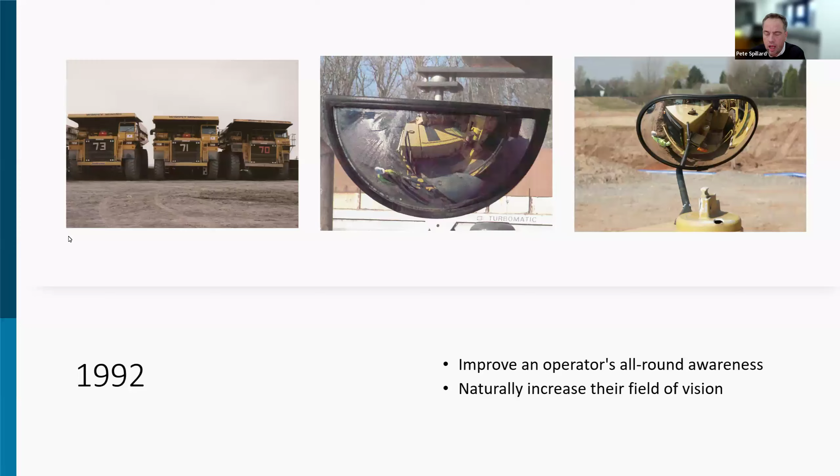32 years ago, we developed what we believed was the first convex mirror for construction equipment. We use it to naturally enhance an operator's field of vision. This particular mirror was developed for 100-ton haul trucks working at Wimpey Mining in Fosslas.

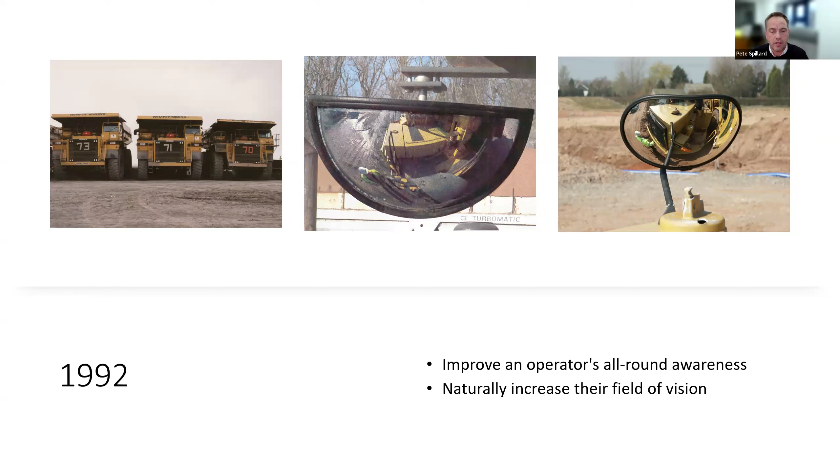Because of that convex mirror, and how we were naturally trying to enhance visibility, it was actually difficult to get this convex mirror, or the concept of improving an operator's field of vision, through to our customers. So this is over 30 years ago.

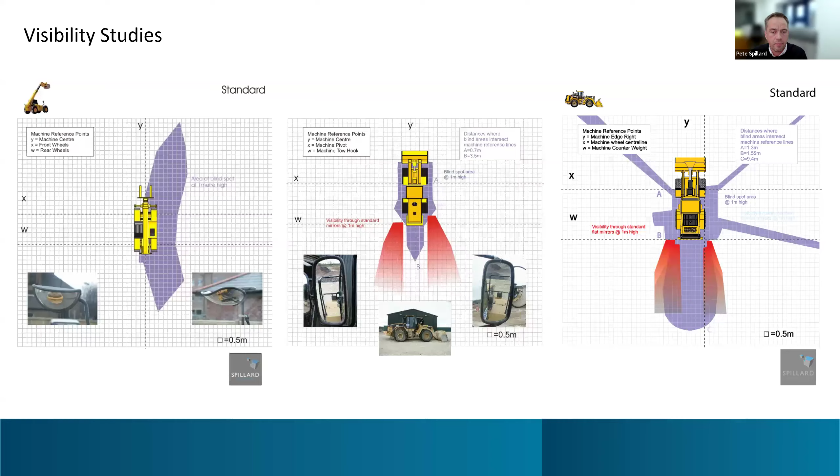So what we actually started to produce was visibility blind spot maps. These allowed us to understand where the restricted field of vision is. We did visibility studies from anything from telescopic handlers, wheel loaders, through to site dumpers, through to 150-ton haul trucks.

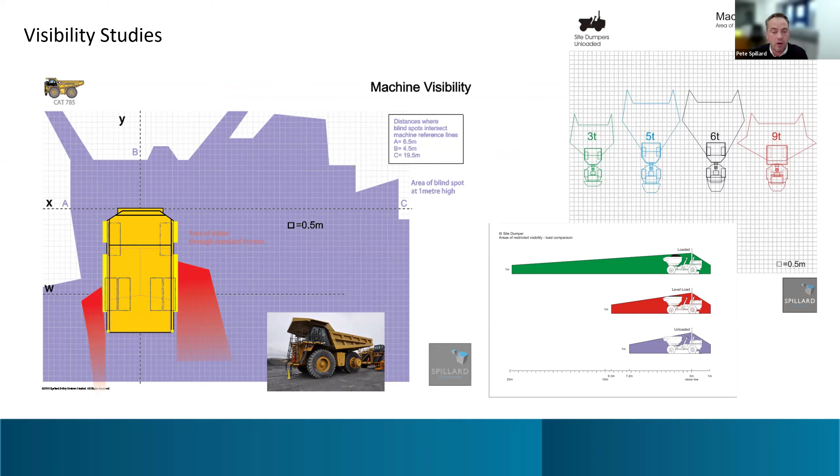This particular haul truck here, on the visibility studies, each of the squares represents the blind spot that's created from the driver's position. So the blue area is that blind spot, and these are the studies that we've been creating now for nearly 30 years. So why are we having challenges on site?

Why are we still having these challenges with moving vehicles? We've installed convex mirrors, reversing cameras, 360-degree cameras now for, as I say, nearly 30 plus years. But struck-by moving vehicles is the second highest fatality rate in the construction industry.

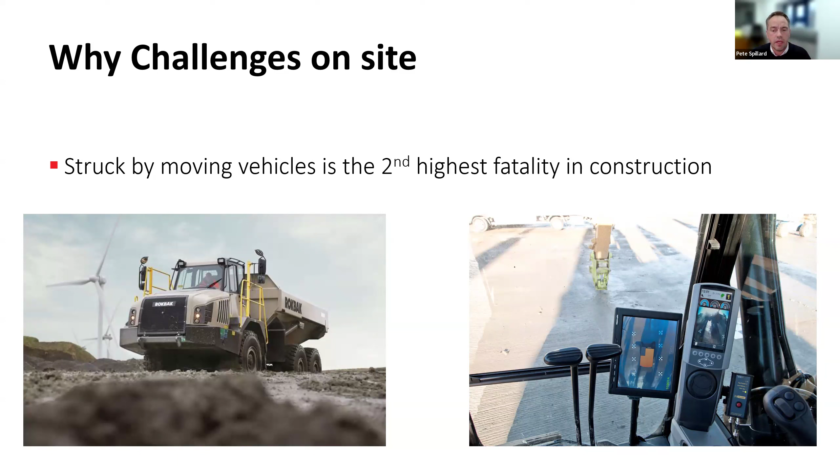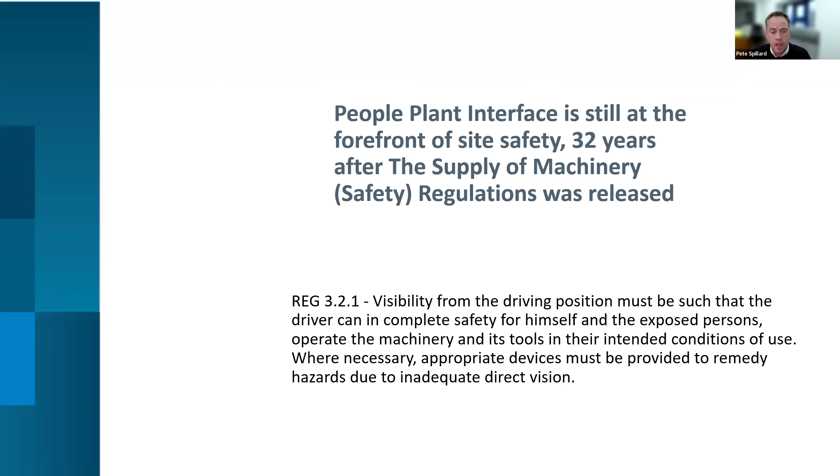We think, because of the work that we've actually been doing, we understand why there's an issue around the challenges that we see on site, and we believe that a small part of it is down to restricted direct vision. This restricted direct vision has started to come through because of things like noise reduction, ISO standards around noise reduction on new machines, and emission reduction. All this accounts for engine bays and engine covers becoming bigger. We look at ergonomics, and the design of machines has lent itself to restrict more and more direct vision. And then we take reduced tail swing, which is a safety feature to stop crush hazards, but it increases the height of the engine cover.

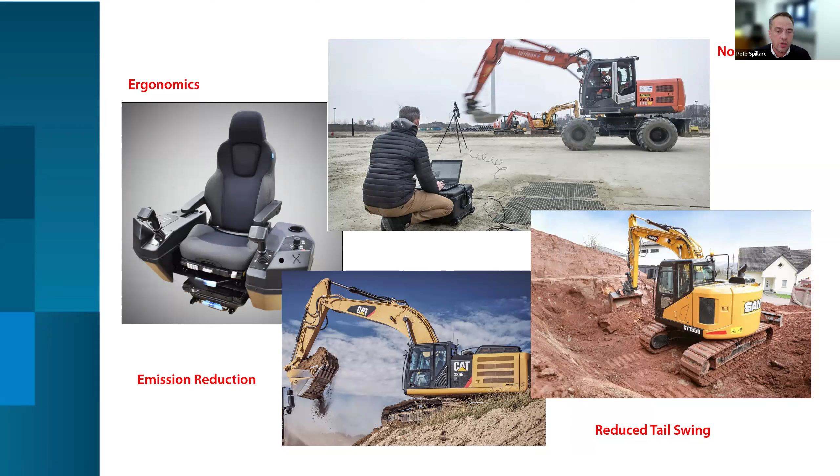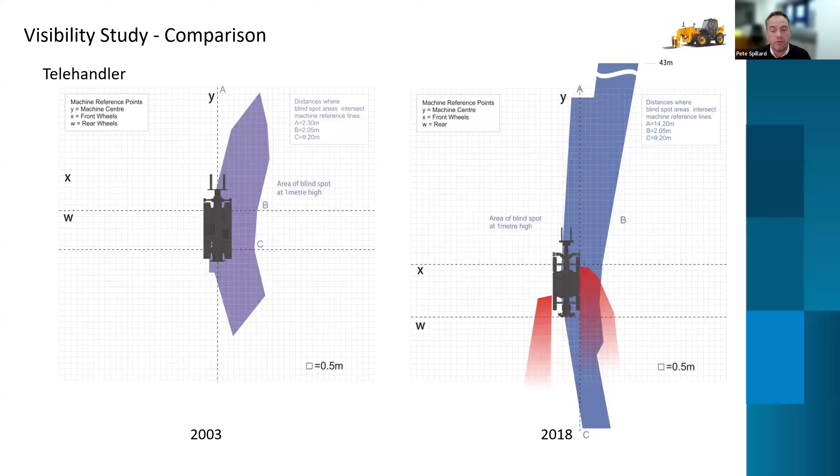In front of this machine, we can't see for nearly 9 meters, so we have restricted visibility for nearly 9 meters. Now we go to 2018, when we've incorporated new ISO standards around emissions, noise reduction and ergonomics. This particular telehandler now cannot see for nearly 43 meters in front, or on the offside of that telehandler.

If we look at a dozer, again in 2003, the restricted visibility around the machine is quite good. We look at 2019, and again this blue area is where the restricted visibility is from, after we've looked at noise reduction, emissions, or even ergonomics.

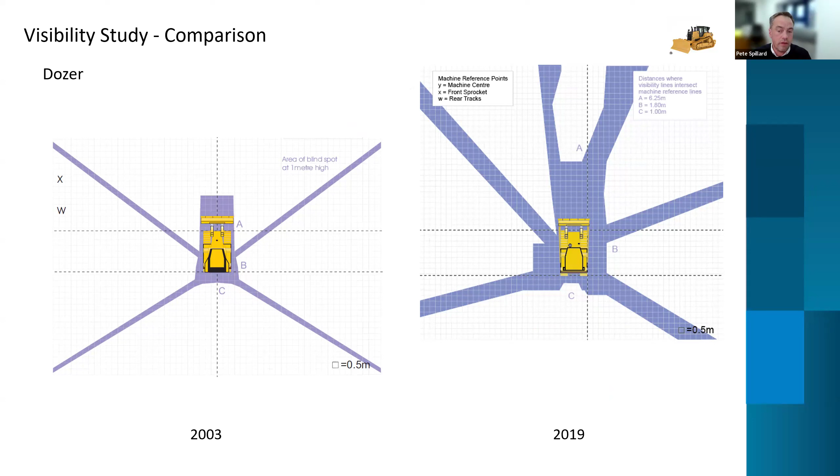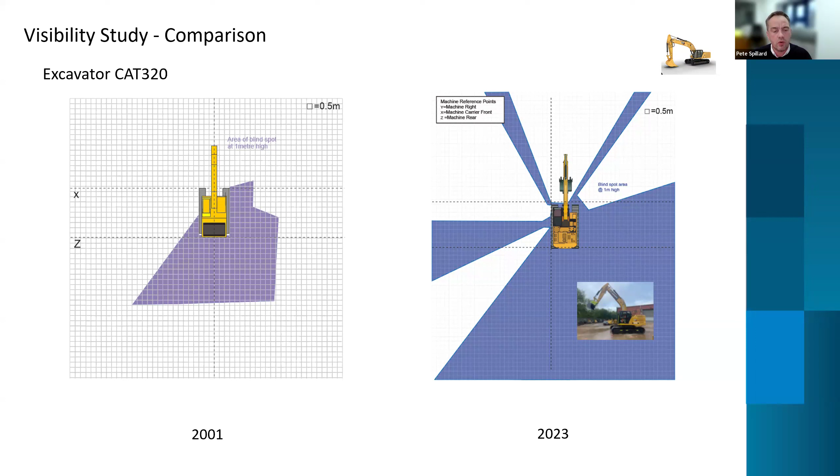We can take it to an excavator, so a typical 20-ton excavator that you would see on any construction site in the UK. We go back to 2001 with our visibility studies, and we see the restricted visibility isn't great, but at least it's not like 2023, where we have infinite restricted visibility around the machines. This is where we try to understand why we are still seeing these problems with construction machines. Another example, 2001 wheel loader, and we see that the areas of restricted visibility have increased again up to 2020.

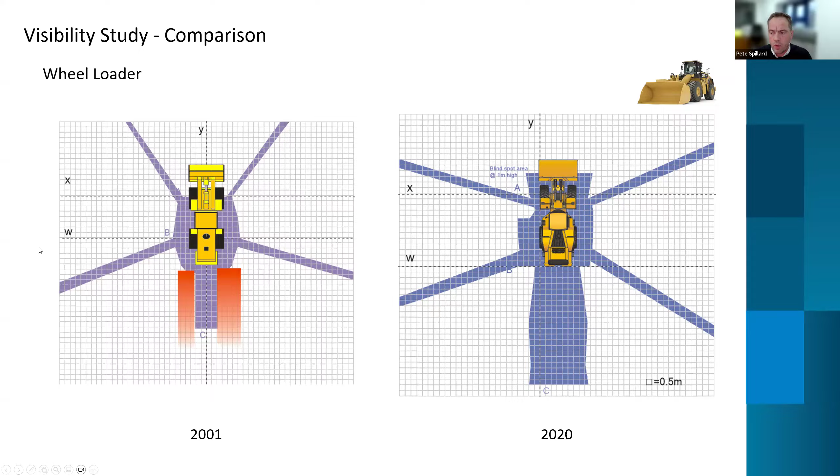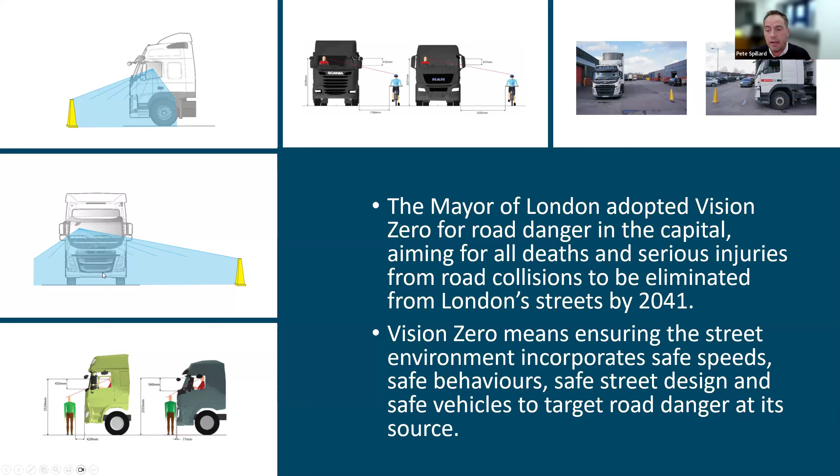So when we look again at direct vision standards - a standard for vehicles traveling into London - it has the same issues as we have with construction machines, and that is restricted visibility. A direct vision standard is designed to reduce the number of fatalities in London caused by large vehicles and vulnerable road users, and it comes back to the issue around restricted visibility.

So we look at a particular commercial vehicle, same as what we've done with visibility studies over the years, and we look at these two machines - this is a concrete mixer and a tractor unit for an articulated tractor unit. Again, we have issues around visibility and direct vision.

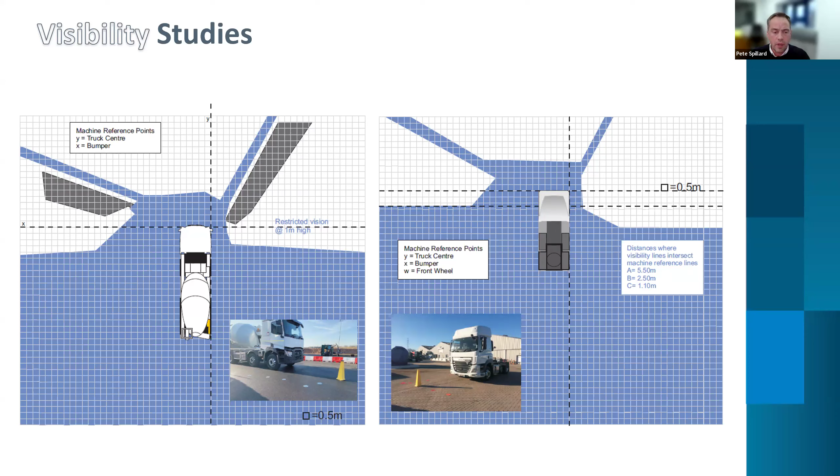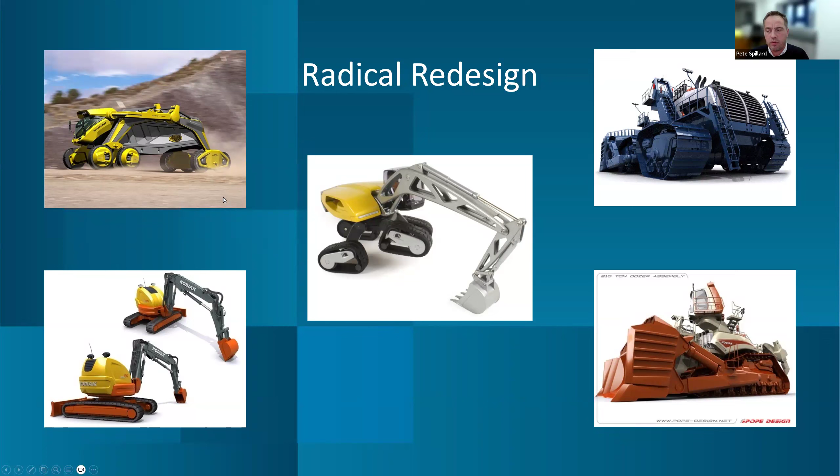Unless we start to look at radical redesigns of construction equipment, we're never going to reduce this issue around the fact that an operator wants to see. We train all our operators from day one when they learn to drive - mirror, signal, maneuver. What we haven't told anybody is that we can't see around these machines. So unless we've got radical redesign, which construction hasn't gone down, but commercial vehicles seem to be going in that direction, looking at radical redesigns around visibility.

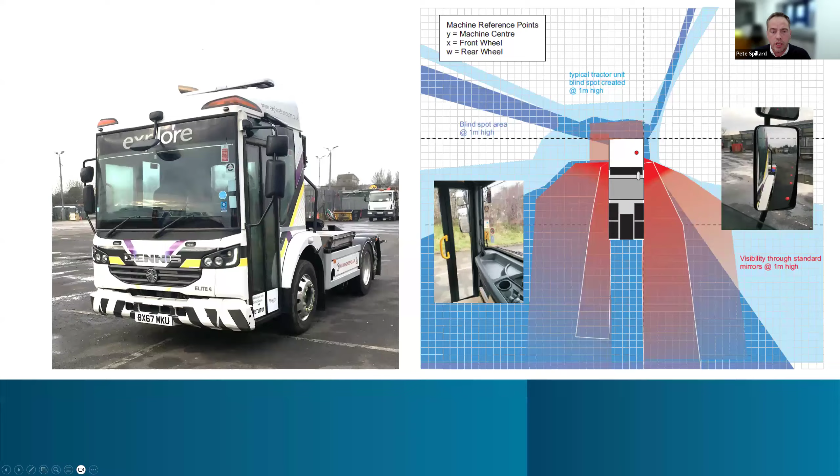But if we don't go down the route of radical redesign, where are we actually going to go? Well, the route we are looking at is maybe technology, and the technologies that we can move into different industries. So if we look at commercial vehicles, we've got the direct vision standard in London, which this year is now the progressive safety standard, looking for AI or human detection to detect vulnerable road users along the near side and across the front of commercial vehicles.

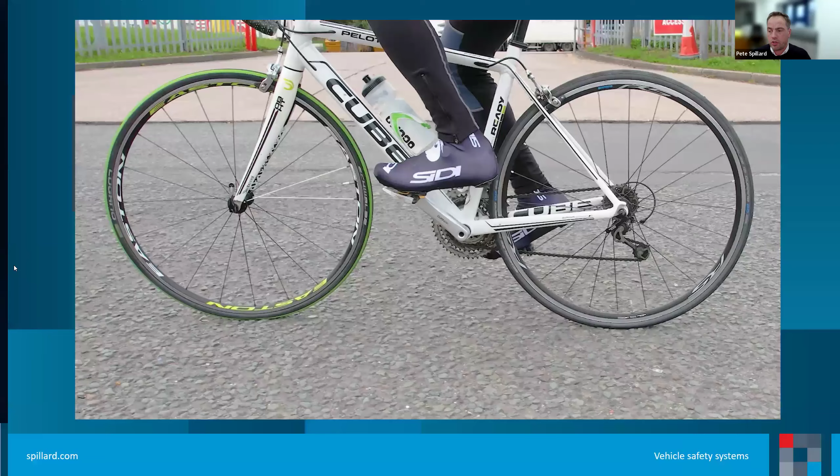So just a quick video to show you how it actually works.

Person detected. Person left. Person detected. Person left.

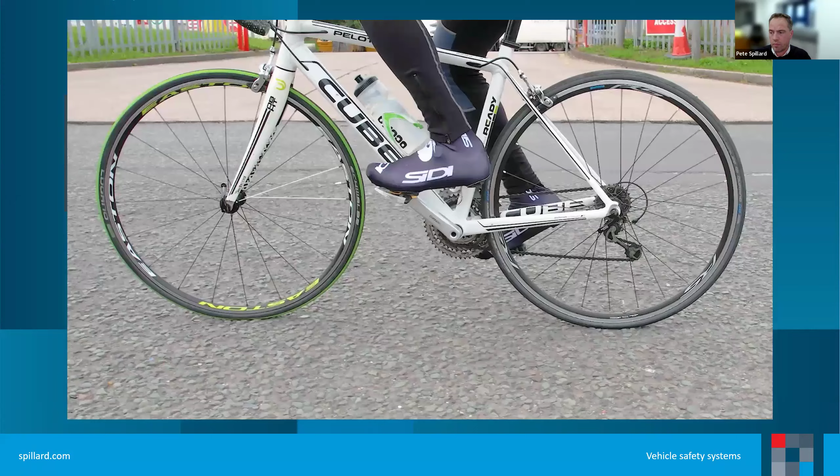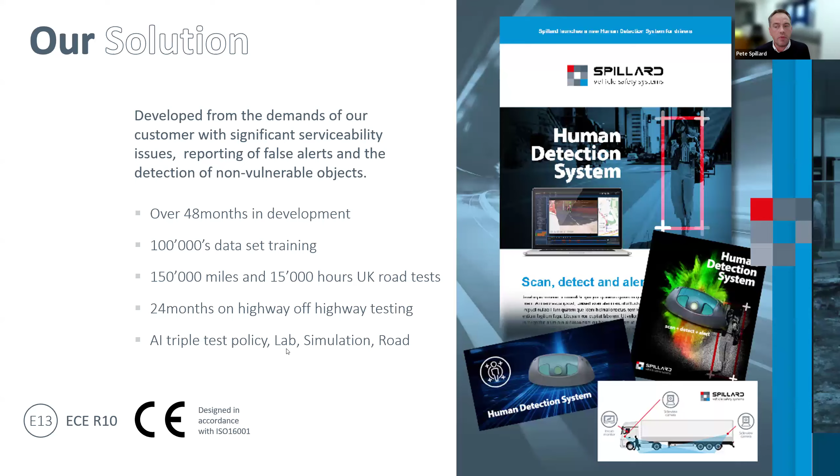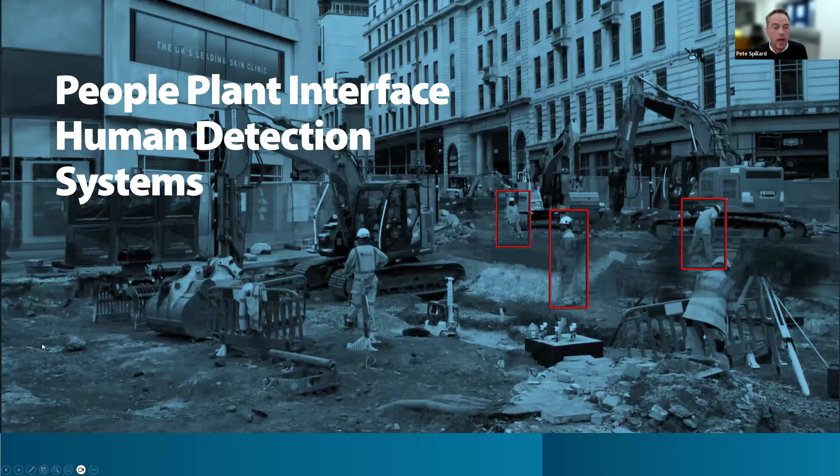So what you've just seen there is human detection. Human detection is a solution we've got, which is an AI camera that has been programmed with over 1 million data sets now to recognize a human form, human shape, human characteristics. We've put it into the commercial vehicle market, as you saw in that video - when somebody is detected, we tell the operator of that machine. We've also now started to move it into plant, so people-plant interface. We put human detection cameras around a machine and alert the operator to where somebody has strayed into a specific detection zone.

So another video just to show you how this actually works.

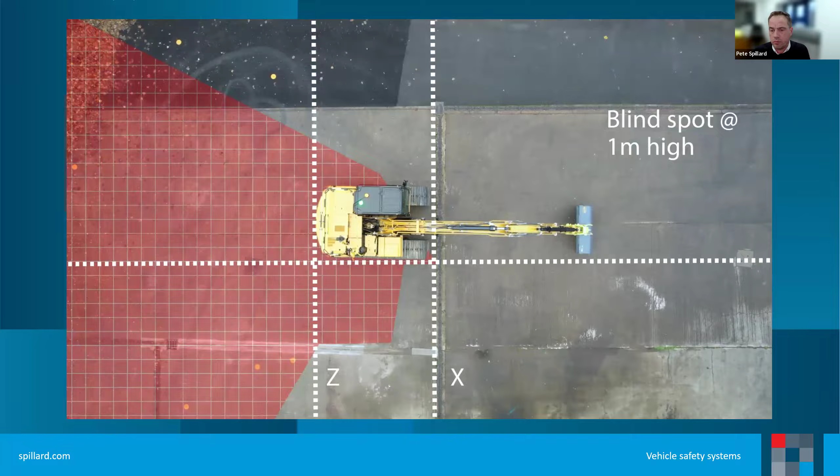Person rear. Person machine front. So we break it up into quadrants, and then we actually tell the operator that there's somebody around the machine.

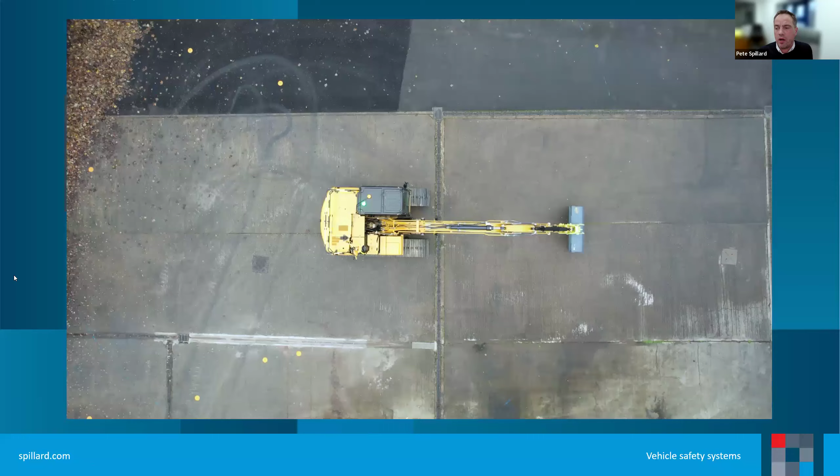So it's all about the technologies that are out there. In the simplest form, we can use 3D 360 cameras, which gives a bird's eye view of anybody around that machine.

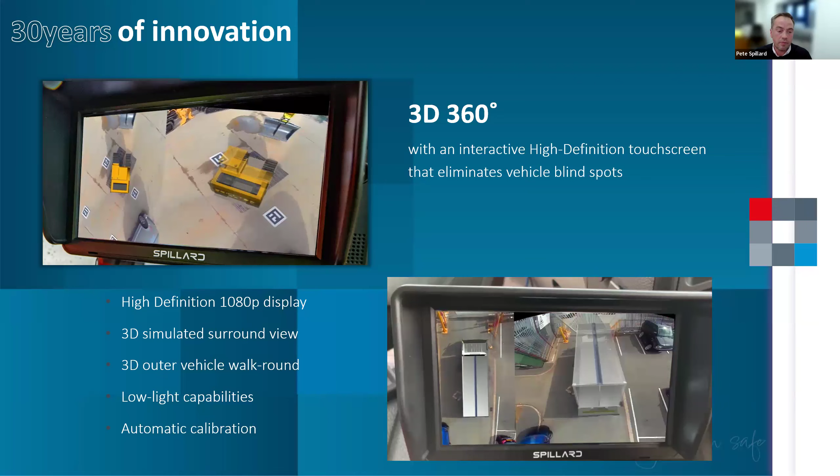So when we go back to the issues on sites and the challenges we have around indirect vision, we can improve visibility all the time, by providing 360 cameras or human form recognition technology to improve all-round awareness. But this has also led us to the fact that we are creating a large amount of data.

So these challenges we have on sites and how we reduce the incident rate, we have to look at different ways, not only technology but also the data that comes from it. Every single system is installed with cameras, and we are pulling live video feeds, which we can use to start to learn and educate our workforce. These challenges are how we change everything, how we change cultures and behaviors on site.

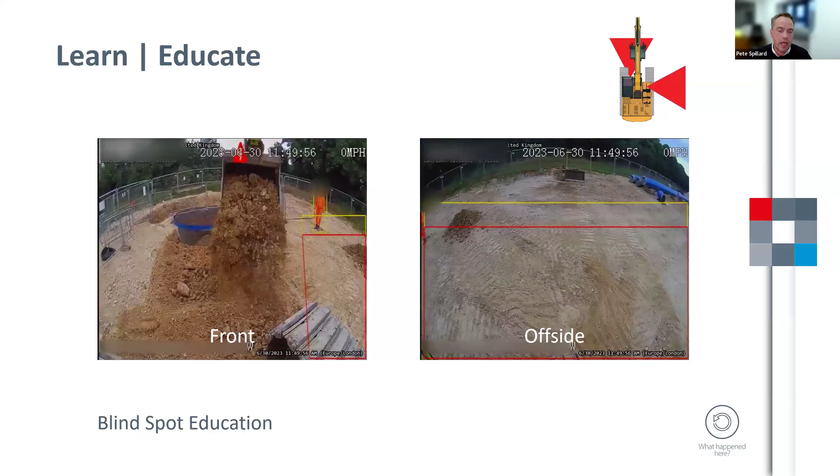This example here is an excavator. If you see in the top right hand corner, you'll see the plan view of an excavator. The red items show you where the cameras are located on that particular machine. This is a person operating the machine, he's digging. You've got a person to the right hand side actually walking down the blind spot of the machine. From the data and video footage we're gaining, we can train and educate around the blind spot.

So another example of this is it could be that we change our site layouts. All these challenges we have on site, we can use technology to change the way we change our cultures and behaviors, and this in the simplest form is site layouts.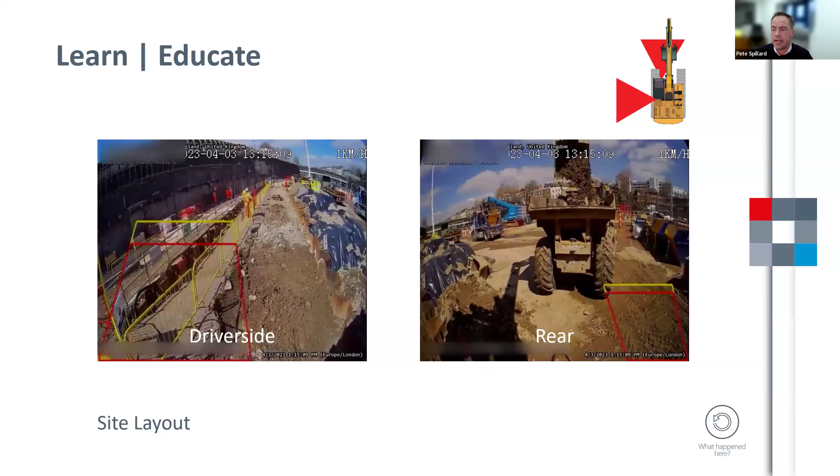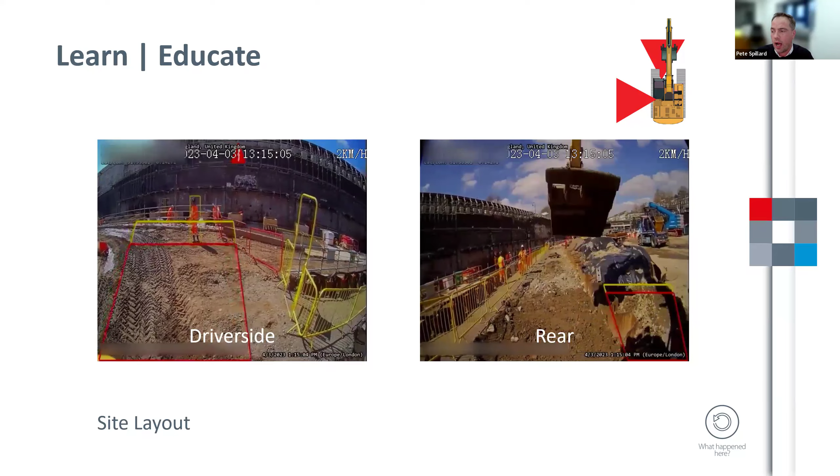So if we look at this video, I'll let it roll a little bit further. You've got two gated areas where they're walking across a haul road. The guy to the left is walking through an area where the excavator is operating. One of the guys is saying, why are you walking through here? And he's pointing to the site layout or the safe walkway, but he's actually walked through the danger zone of an excavator. So we start to learn about site layout from the data we're picking up.

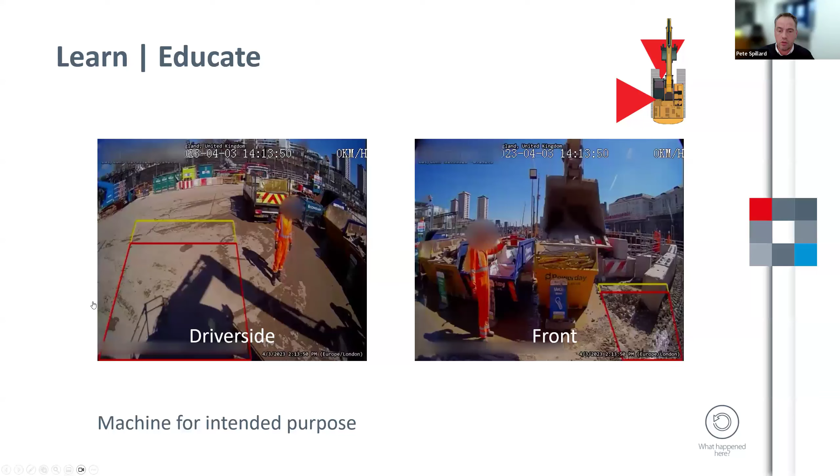So this is a particular example of traffic management, machine fit for intended purpose. Again, we've got the machine loading the skip with metal. The guy takes a step back, yet we've got somebody supervising it. So is the machine there for the intended purpose? These questions can be asked because of the data we're gathering and what we're putting together.

So this one's pedestrian segregation, and it's quite a good video and example of how incidents can happen on site and how we can train and educate. Just to explain this video, you've got a guy walking towards an articulated dump truck. The dump truck actually stops because he believes the guy is going to walk past him. You'll see the ADT starts to move again, because the guy has been distracted by the person in the excavator calling over to him. I'll let that carry on playing through.

He's now stopped. He's been disturbed by the person in the excavator and the excavator. So it's all about how we learn, we educate, and how we actually try to train this out of what's happening, all these challenges we're seeing.

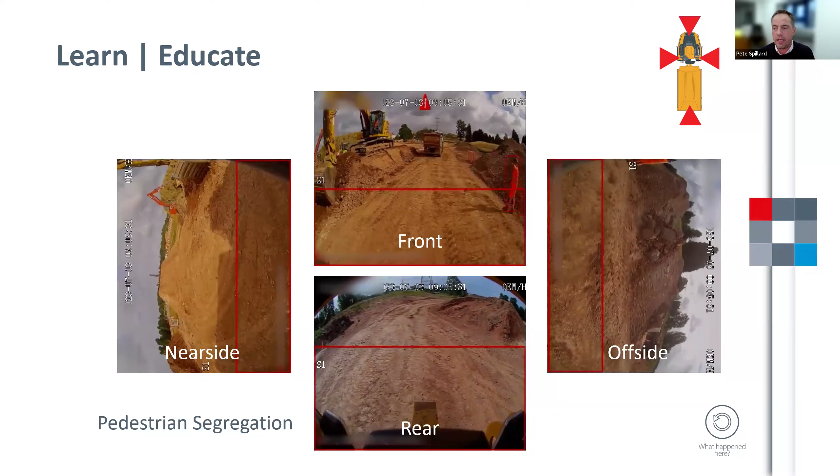Again, a further video, another one. So this is culture and behavioural change, maybe. These guys have been talking to the operator. The operator doesn't actually give them enough time to walk away before he starts slewing around on the excavator. So again, all this data we're finding and talking about starts to change behaviours and cultures around what we're doing, so we can remove these challenges on site.

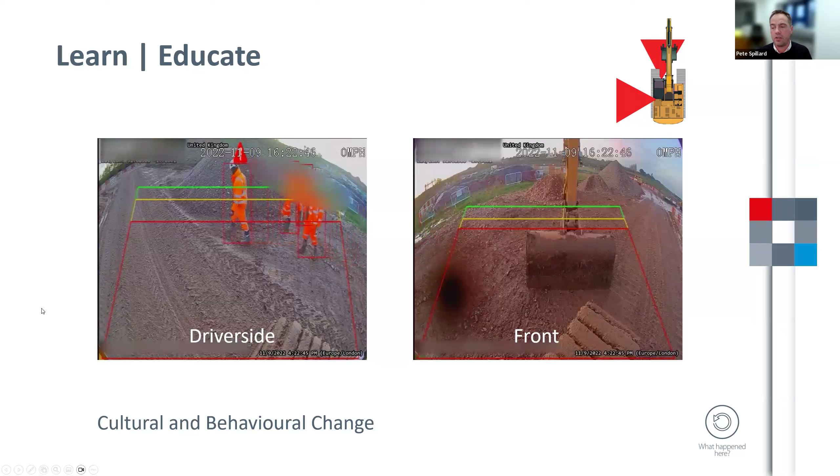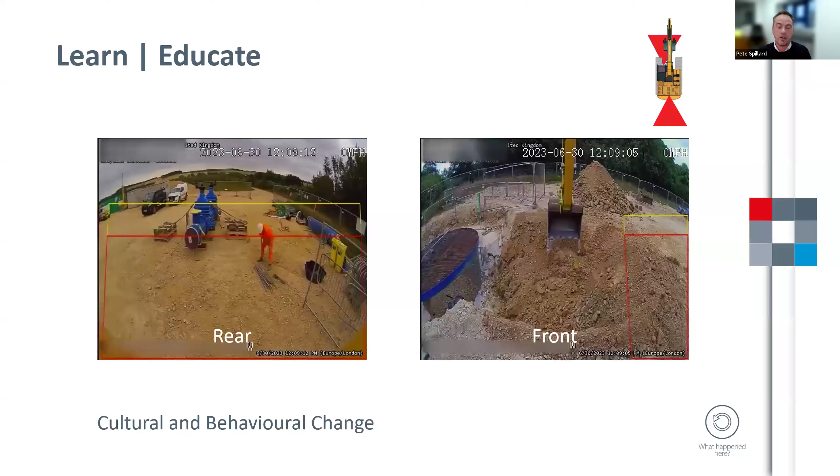So the final one here, guy's walking up to the back of the excavator, kicks a bit of wood out the way, decides he wants to clean up, so he's picking these sticks up, yet is within 3 to 4 meters of a working excavator. So it's all about these culture and behavioural changes that we're starting to learn from the information we're gathering, when we started around blind spot maps, but this is where it's actually taking us at the moment.

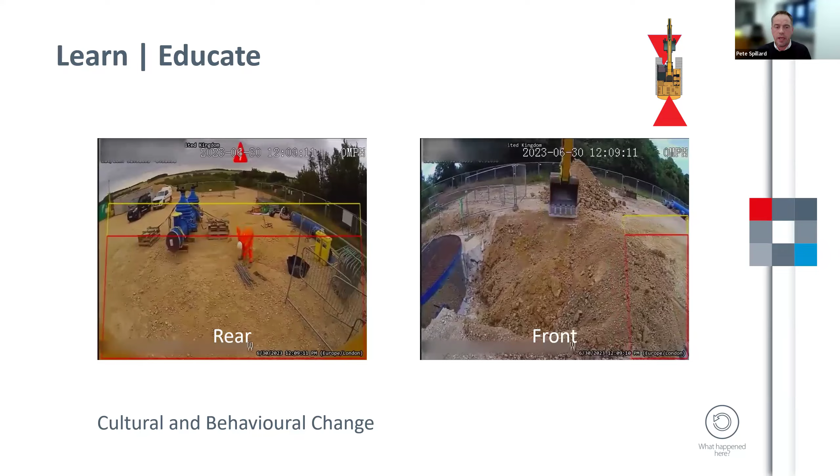So we've got all this information, we've got this detail, we're talking about how we change culture and behaviours. But for me, we also need to look to the future.

I think for this, the future is all about collaboration. It's about how your supply chain collaborates, how your different safety suppliers collaborate. We can't all do it together alone. Yes, we can provide the video footage, yes we can provide whatever we do, but we can't all do it. We need to collaborate. So this is an example of a collaboration between four different partners.

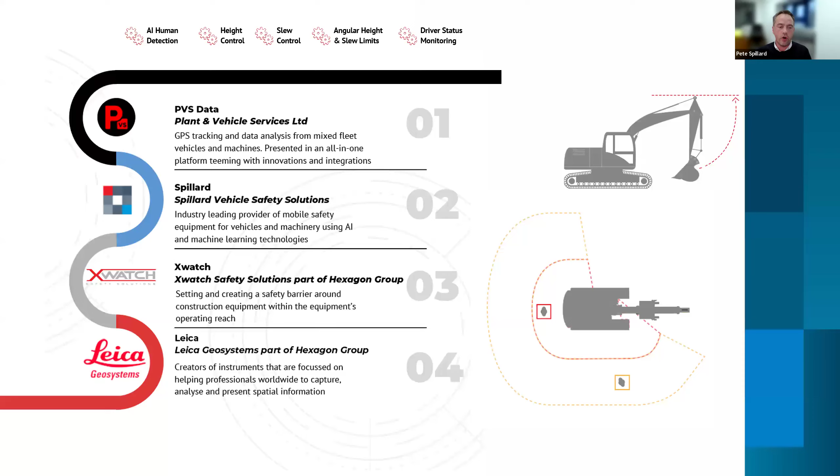They've come up with a way of actually controlling machines. So we're controlling the machines using a lot of different data, a lot of different machine control, whether it's 3D avoidance, whatever it is, to be able to control the data. So we take the data, we take the video, and we collaborate together to come up with different solutions.

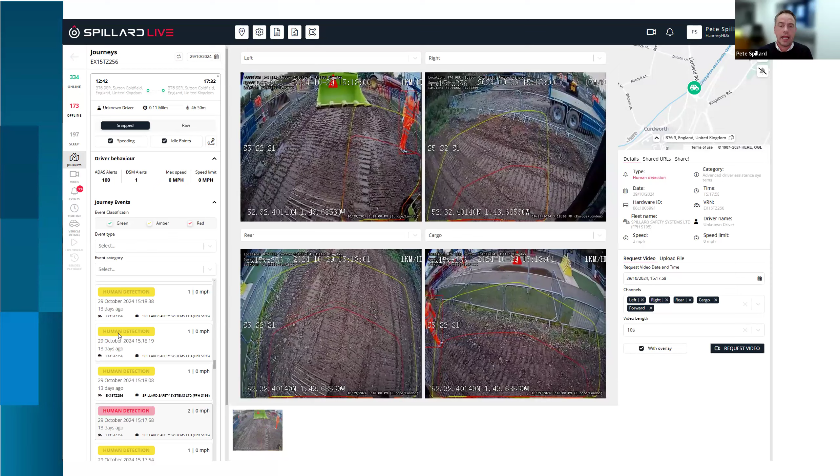This particular solution is back to an excavator that has control mechanisms in them. So as soon as the person is detected within the red zone of an excavator, it actually stops the machine. So this is where we talk about collaborative approaches, and collaboration is how we get to a safer site and how we remove the challenges around what we're actually seeing.

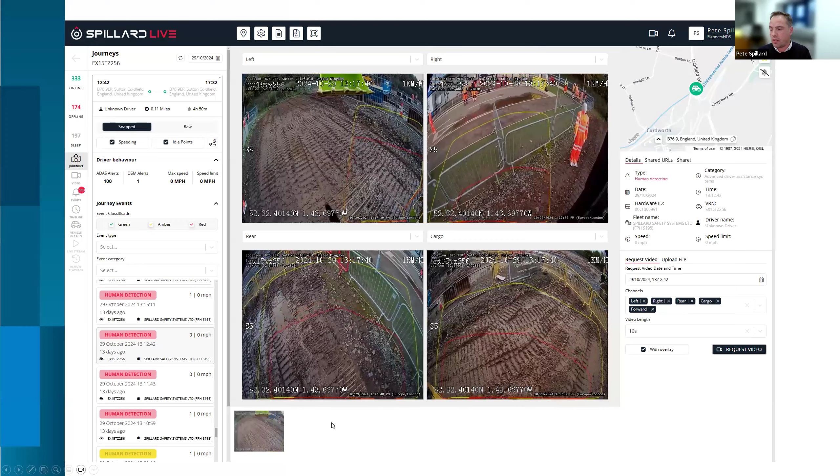Yes, we can segregate our vehicles and pedestrians, and that is the key priority. But we've now got the video evidence and the video data to understand how we segregate our vehicles and pedestrians. We can review our existing and established traffic routes because we can see it on the video. So we can start to reduce the actual incident rate by looking at what we've got. That's how we get around the challenges around construction machines and HGVs.

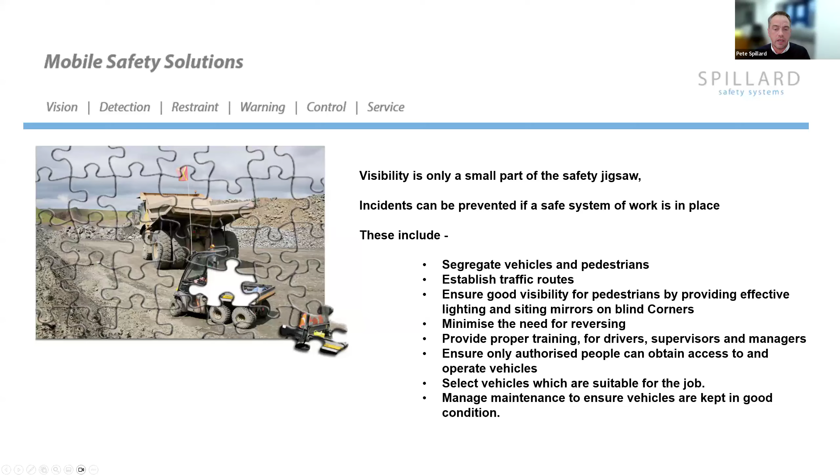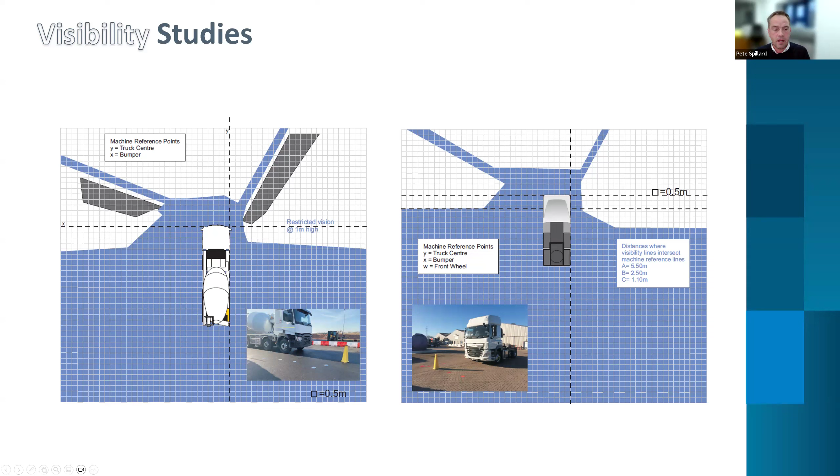All I would say to everybody that's listening is, don't get around these machines. Don't undertake them. You cannot be seen, and when they're sat up in that cab, they cannot see the information. So that's everything, that's my presentation. Hopefully there's plenty of questions, I'm quite happy to field them.

It's about me trying to get over that there's blind spots around these machines, blind spots around road transport vehicles, and we are looking at all different technologies to remedy these problems. The ideal solution is to go back to the beginning and radically redesign and improve people's direct vision, improve the operator's direct vision, increase their all-round awareness, and allow them to operate the machine safely.

Brilliant, thank you very much, Pete. That was taking us through those two different elements. And as I said at the beginning of the presentation, it's something that we adopted, the human form recognition, in Anglian Water, in our construction side of the business. Our biggest learning from that has been about the behaviours.

It has been fascinating to see, trying to understand the behaviours, and with the videos recording, we've been able to see what operatives are doing. There's a lot of complacency. People are just forgetting how big this plant is, these vehicles are, and they're a bit complacent that, oh yeah, my mate who's driving that vehicle, might be my brother, my mate, I've worked with him for years, is never going to hit me. But these things do happen.

They're operating a very large bit of plant, aren't they? So it has been interesting to take the videos and use them for training purposes, but also for incident investigations. So yeah, there's been great value there.